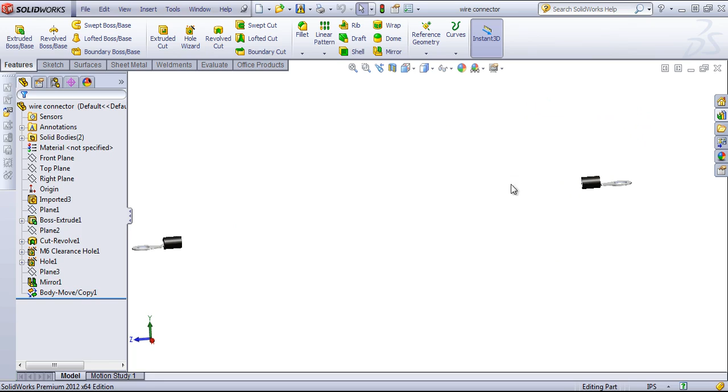One of the more compelling uses of the swept boss base is creating a 3D sweep. So these are two of the identical part that are non-parallel. And we're going to connect this by a wire, or what would be a wire, through a 3D sweep.

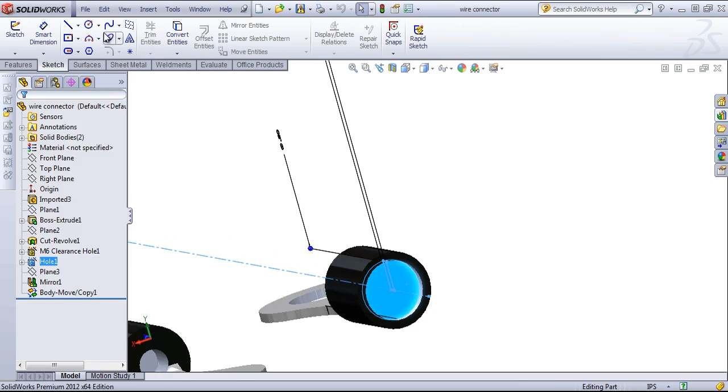So we'll require two things for this. We'll require the profile sketch once again, as well as a 3D sketch to add in our path. So I'll go ahead and select out this face. And then draw in a circle. And then I can give this a dimension of 0.1 inches.

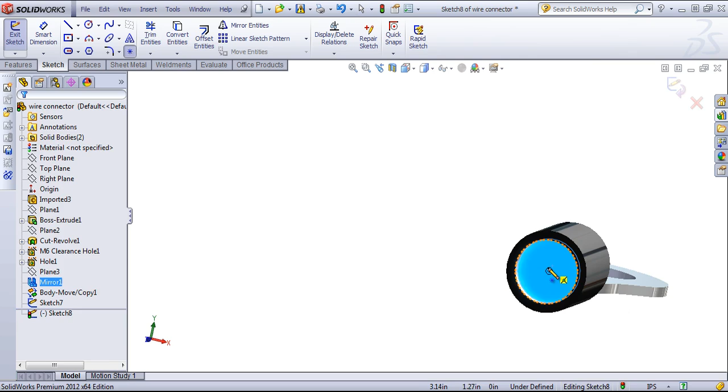And now I want to draw a sketch connecting this point to the center of this face. And so I'll quickly just create a sketch on this face just to add in a point at the center of that face. And this will just allow me to connect up the two sketches more easily.

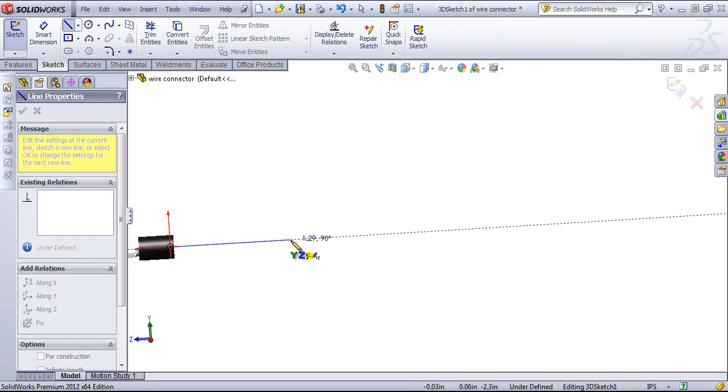So now I can go ahead and come in to the sketch pull down and choose 3D sketch. And I'll start by drawing out a line along the Z. So you'll see next to my mouse that there's an icon for along the Z with yellow, which means that relation is going to get added. I can also change the plane that I'm sketching in by pressing Tab.

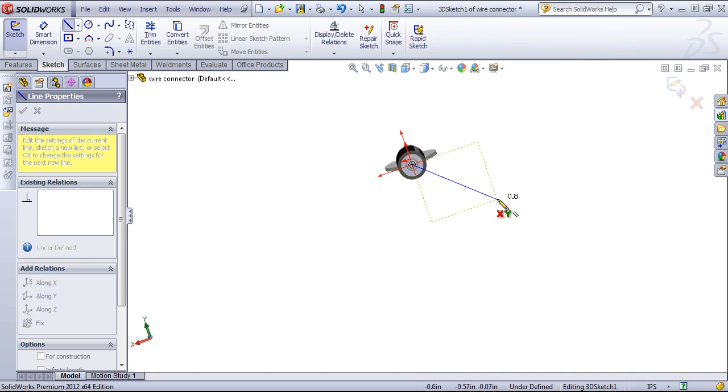Just keep in mind that if you're unable to change the plane when you press Tab, that you're essentially normal to that plane or pretty close to normal. So SOLIDWORKS won't look at the other planes. But if I rotate this slightly, or even switch to an isometric view, then I'll be able to toggle between all three of these planes.

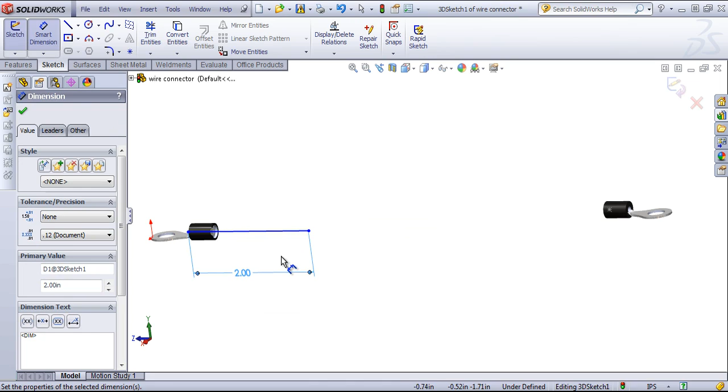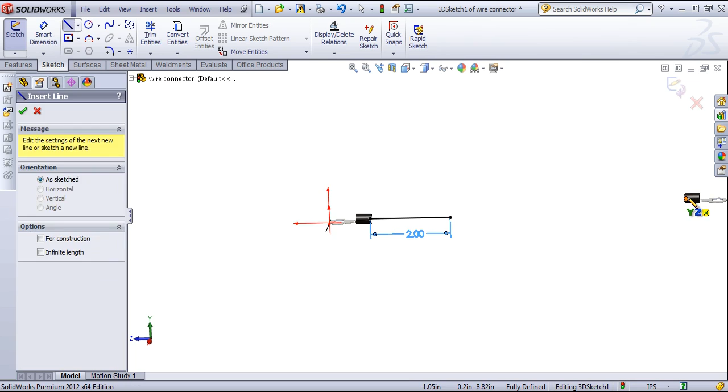So once again, along the Z, and I'll give this a dimension, say about 2 inches. And I just want to make sure that this point is coincident to that center. And then I'll re-add that dimension. I want to do the same from this point, just along the Z.

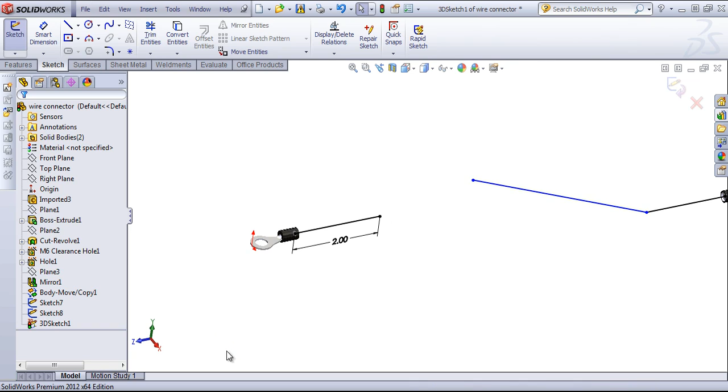And then I want to draw another line out. This one in the ZX plane. And if you're having trouble figuring out what plane to draw in, you can look at the triad at the bottom and see how each plane would be oriented. So I'll go ahead and give this a length of 1 inch.

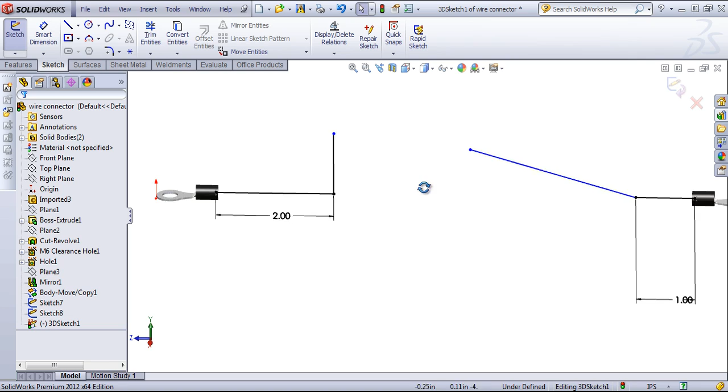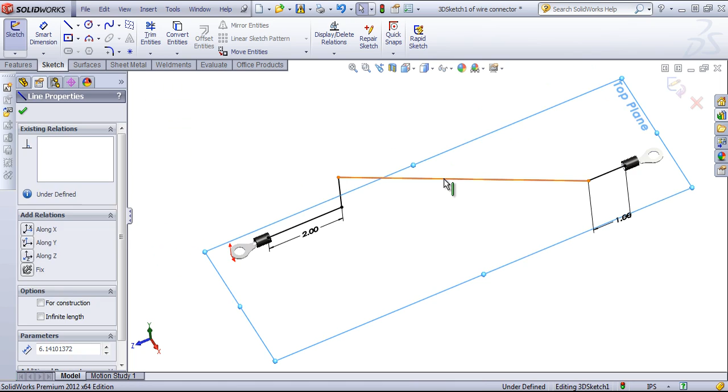Then I'm going to draw up a sketch vertically, and I'll change the plane so I can go up in the Y. Now I want to go ahead and make these two merged. And I want to make this line parallel to the top plane.

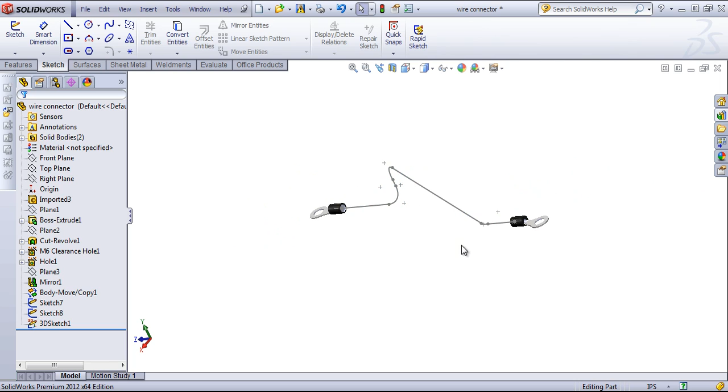Lastly, for our path, we want to add in 3 fillets of 1/2 inch. And then I have my completed path. Lastly, I just need to create the sweep by choosing the profile and then the path. And then I can click OK. And I have that completed wire.

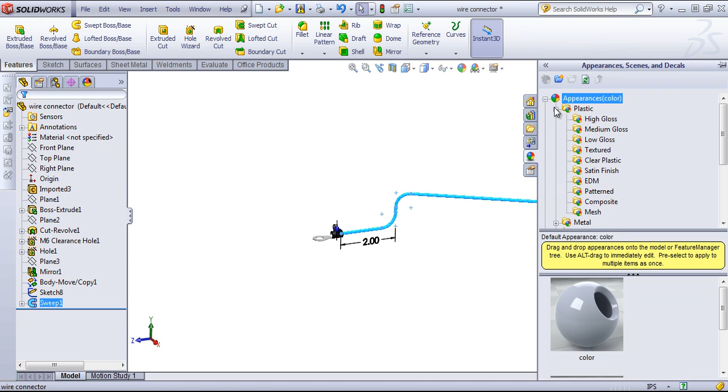And if I want as well, I could always add in an appearance. In this case, maybe a low gloss plastic. And there we have our completed wire.